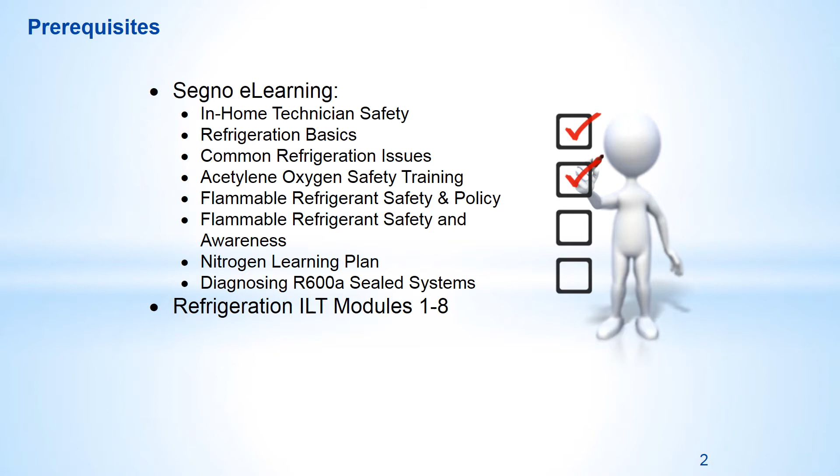Prior to taking this course, you must complete the following prerequisites. In Segno e-learning, In-Home Technician Safety, Refrigeration Basics, Common Refrigeration Issues, Acetylene Oxygen Safety Training, Flammable Refrigerant Safety and Policy, Flammable Refrigerant Safety and Awareness, the Nitrogen Learning Plan, and the Diagnosing R600a Sealed Systems Learning Plan, and Refrigeration Instructor-Led Training Modules 1 through 8. It is recommended that the modules be taken in the order shown. This is Part 1 of Evaporators and More.

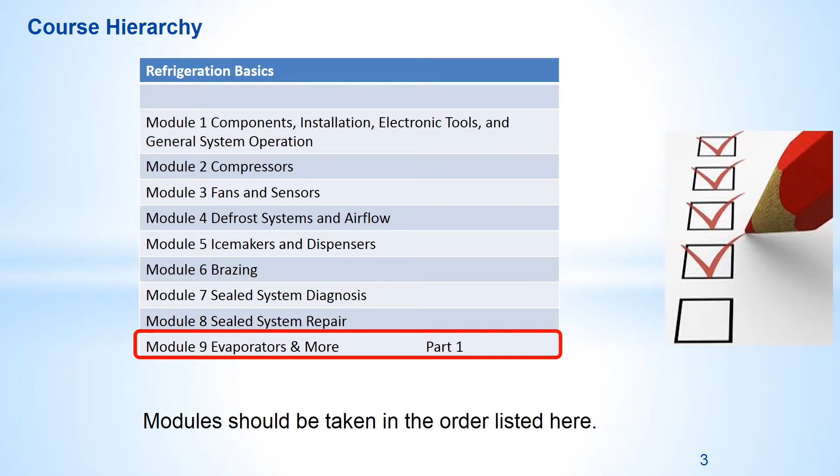In this course you will learn how to understand when, why, and how to use dye dryers, review the evaporator and heat exchanger replacement process, discuss the non-repairable scenario, understand different designs of dual evaporator products, describe how the stepper valve operates and how to diagnose, and understand how to diagnose and order parts for the R600A system.

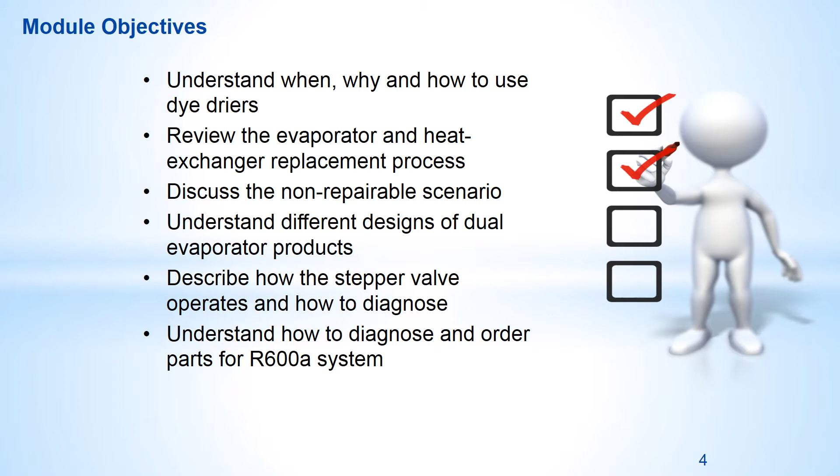In the prior modules and per Service Bulletin 46-11, the leak checks can initially begin with the electronic leak detector and gas trap if refrigerant pressure currently exists in the system. You should always be on the lookout for traces of oil as well. When that doesn't work, or if there is no pressure or not enough pressure, any remaining refrigerant in the system is recovered, then dry nitrogen is used at maximum safe pressure and the leak found using an approved leak detection solution. When the leak is located, safely release the nitrogen, then repair the leak and replace the dryer.

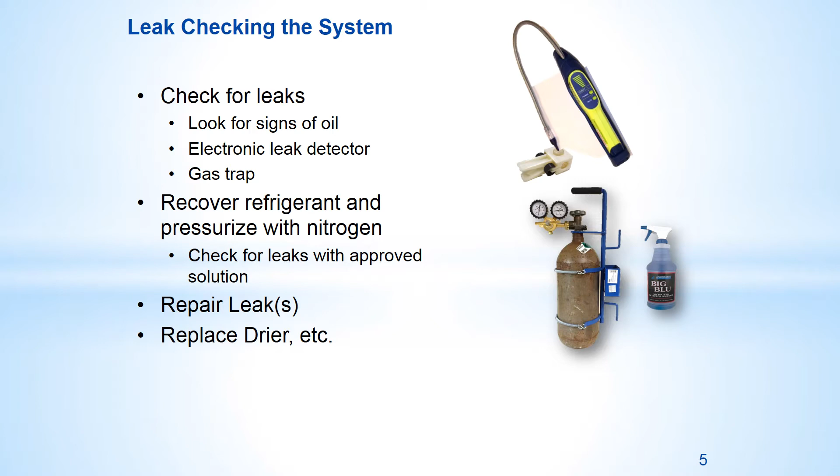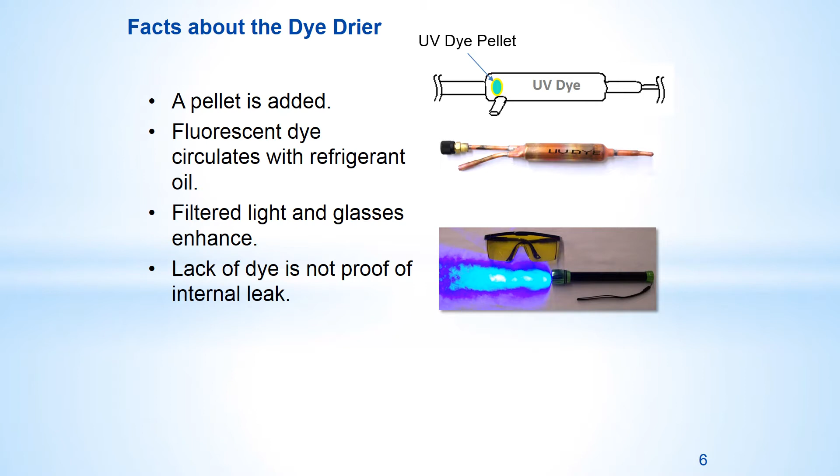Service filter dryers labeled as UV dye contain a dye pellet inside. The pellet releases dye into the refrigerant and oil and requires time to circulate throughout the system. 72 hours of operation should be allowed before examining with the UV light and glasses. Most but not all refrigerator manufacturers promote the use of the dye dryer during a seal system repair. When a dye dryer is already installed on the product, a search for dye can aid in locating a leak and can begin right away. Otherwise, the dye must be circulated throughout the system during normal operation and therefore it is recommended to return 72 hours later.

A lack of dye found on an external component and tubing does not prove that a leak exists internal of the cabinet. Be aware that fluorescent leak detection solution can appear to be a leak when using the filtered light and glasses. All solution should be wiped off completely, as some may pit the metal tubing and create a leak. Also, the Lokprep used for Lokring connections can also simulate dye. A factory Lokring is shown here. Here are some examples of service dryers with UV dye. Most product does not include a dye dryer during production and therefore it is not typically listed on the parts list.

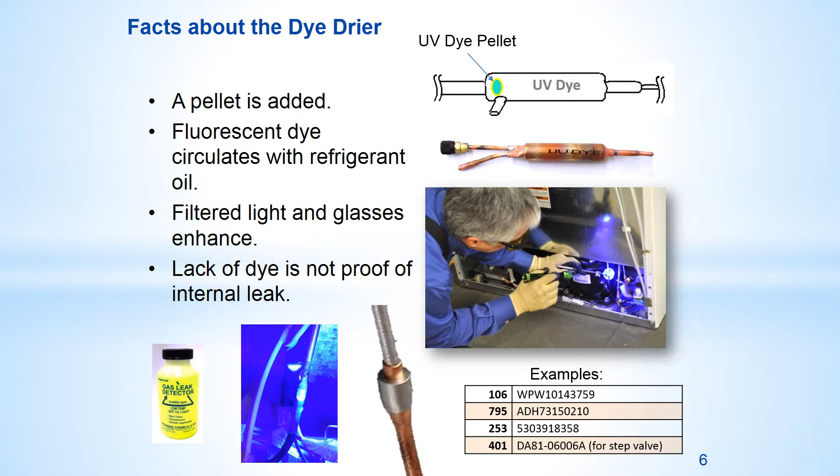There are some exclusions for dye dryer use. Do not install a dye dryer on a product where the seal system components are in direct contact with a consumable item, such as a freestanding ice maker of the type where the water flows across the evaporator. If a leak develops, the dye will go into the water or ice and could be consumed by the user. Also, GE does not allow dye in their refrigeration product and will not pay that claim and will likely void the warranty. For GE branded product warranty service calls, do not install a dye dryer, again, as GE does not allow it. On an out-of-warranty call, such as on a protection agreement call, a dye dryer may be used on GE product.

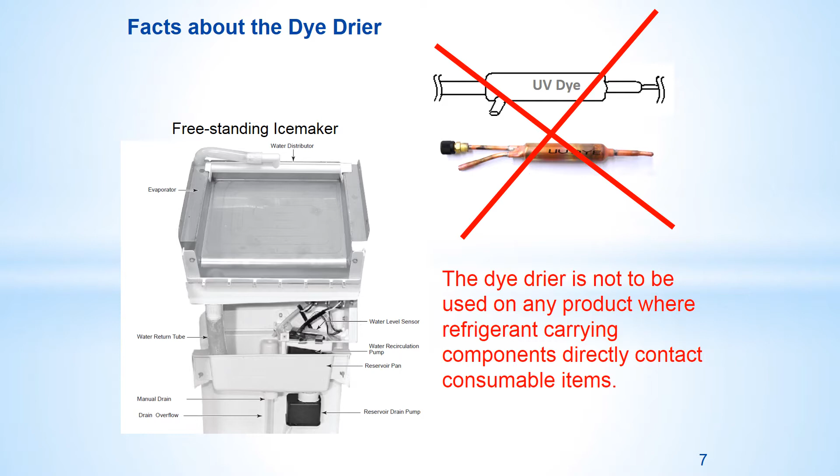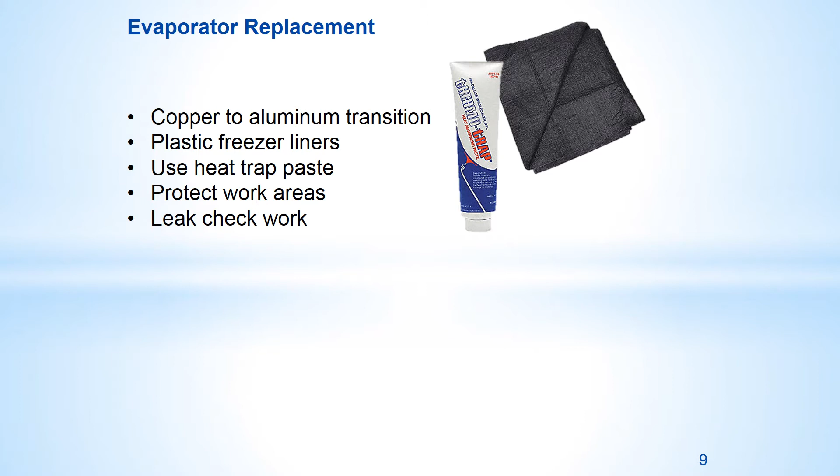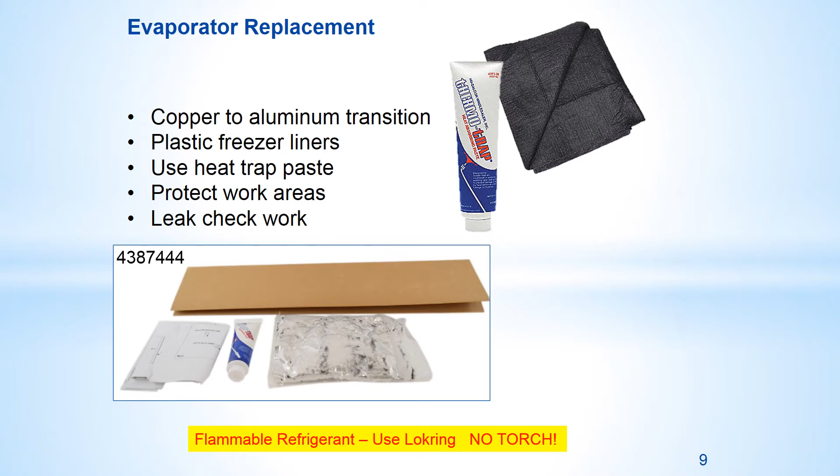We do not repair aluminum evaporators, and most are replaceable. When brazing, do not overheat the aluminum to copper transition. Precautions are required not to damage plastic parts and liners. Flame barriers and heat-absorbing paste are a must to protect and prevent damage of plastic parts and liners. The Whirlpool Kit 4387444 includes the paste, flame guard, and a cardboard canopy to keep the heat from the torch from rising and damaging the ceiling in the compartment. All flammable refrigerant systems must use Lokring and no brazing. Lokring can, however, be used on any refrigerant and will eliminate heat-related damages.

Up next are two videos created by Electrolux Frigidaire, and even though these videos have been around a while, the topics of evaporator replacement and heat exchanger replacement are still relevant. Take notes in your participant guide as you watch the videos. Make a point to discuss with your mentor or trainer some things that should be done differently.

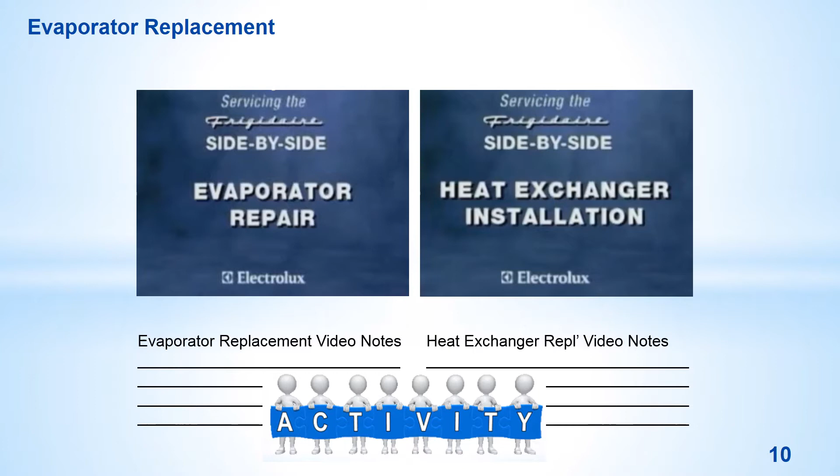Okay, on the evaporator cover, I've already removed the shelves and some of the screws, but one thing I want to point out: it is very necessary when you put these back in that you put the bottom lip of the evaporator cover inside the drain trough. Now, this is a little different than previous models where it went on the outside. Putting it inside will assure any water running down the back side of the evaporator cover will flow into the trough and not leak out between the trough and the cover, winding up underneath the basket in the bottom of

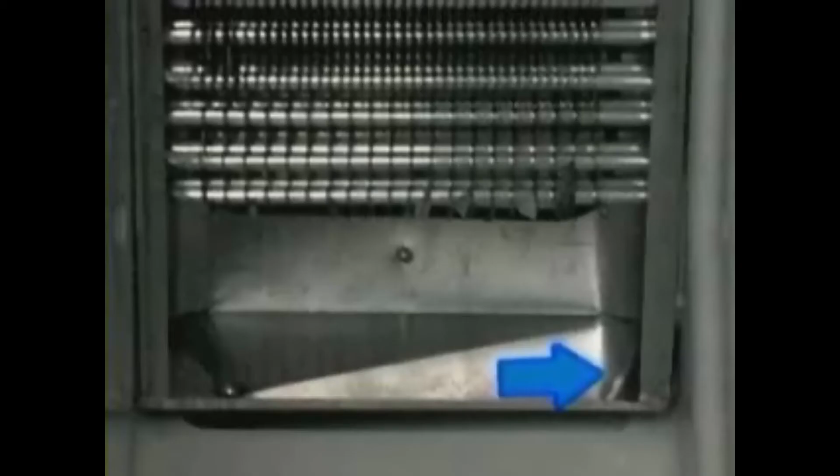your freezer. As you can see, your air return hole right here, but it goes down at an angle, about a 45-degree angle, returning from the food compartment, so you don't have the straight through, and this does stop a lot of the backwash coming through it.

To service the fan motor, it's a lot easier if you remove these two screws. That'll let you lift this panel up without putting a fold mark in it. Now, I found it a lot easier if you just take one of the shelves, sit it back in place and let the cover set down; that'll hold it up out of your way. Unplug the fan motor, disconnect your ground wire, and the fan motor assembly will slide out of here in one complete unit. Then you can go ahead and replace the fan motor or fan blade, whatever you need.

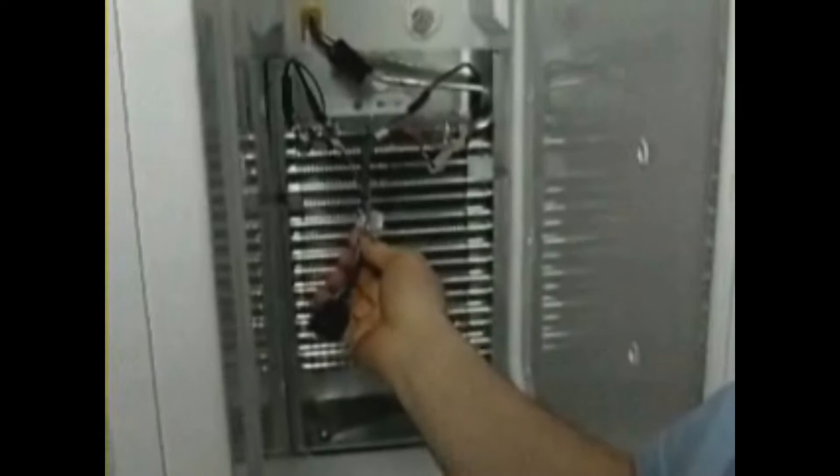Defrost limit switch, of course, is snapped over top of the aluminum evaporator. Simply a matter of reaching in and unclipping it. Now, you will find that it is part of the wiring harness now. Your defrost limiter is hardwired into the harness to get rid of connection problems. The kit that you'll get when you order a defrost limiter will have two solderless connectors and two pieces of heat shrink, so it will be necessary to cut and splice them in.

The defrost heater itself still has the bayonet quick disconnect plugs, so you can unplug your defrost heater, disconnect your one wire, and this takes out basically the removable part of your wiring harness.

Okay, first you're going to want to get the black damper off of here, so take a pocket knife and cut a slit down through here. Remove your damper pad. At that point, you're going to take your three-cornered file and cut yourself a notch around your capillary tube and go ahead and break your cap tube off. Then go ahead and cut your suction line loose from your evaporator. Bend your evaporator up out of the way a little bit. You've got three screws that you're going to have to remove because you will have to tip the drain trough to pull the evaporator out.

Get a hold of your evaporator drain trough and slide that thing slightly forward. And take it on out of the product. Drill out your single pop rivet. That'll allow you to pop your clamp out and take your old evaporator out of your drain trough.

You'll at that point have to transfer your defrost heater to your new evaporator and make darn sure that you replace these two foam blocks that go on each side of the evaporator. They are essential for the refrigerator's operation, and a lot of times they get left out. But these are what force the air to go between the fin and tubes and not go up alongside and bypass the evaporator. Set your evaporator back down in your drain trough.

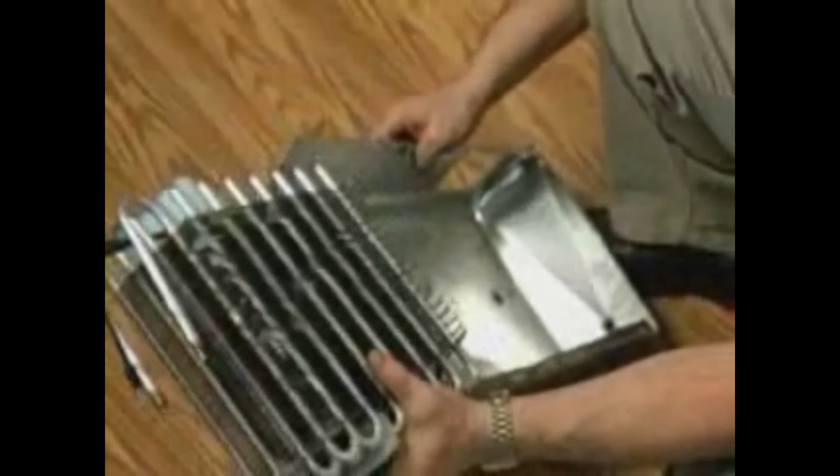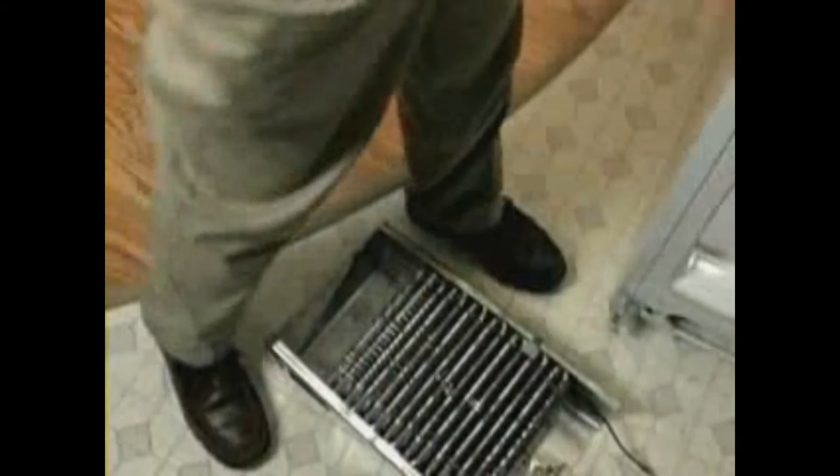Take your replacement hanger bracket. Now that you've got this ready to go back in, we'll have to prepare our heat shield for the back of our liner to protect it from damage when doing your welding. Coming in your evaporator kit, you've got a fiberglass cloth. Just take a sharp pocket knife and cut yourself a small X right in the middle of the cloth. What you want to do at this point then is push this over top of that heat exchanger sticking out of the back of that cabinet.

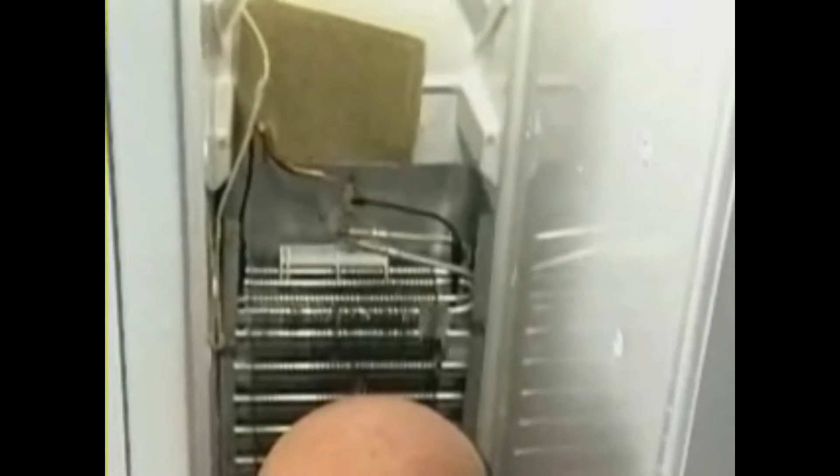Okay, now take your drain trough and set it back in place, using the drain trough to hold the heat shield in place. This will allow you to slide your evaporator up. Line up your suction line and connect it into your new evaporator.

Okay, go ahead and insert your capillary tube back into your evaporator. In most cases, you will have to crimp it just a bit. Make sure it stays there until you make your weld.

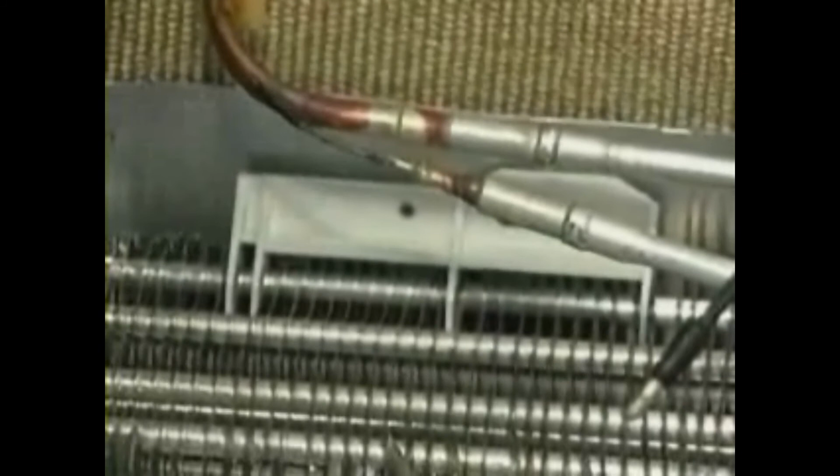At this point, you're going to want to take your heat shield off, but before you do that, go ahead and take your inspection mirror and go around your welds real well, making darn sure that you've got a good weld before you take that heat shield out of there. Check both your suction line and your capillary tube. For the few minutes it takes, it's a lot easier than trying to fish that heat shield back in again once you've removed it. Looks like we've got a couple good welds.

Now at this point, what you want to do is simply go into one of the seams and just start slitting the heat shield and pulling it upwards. The heat shield was designed for one-time use. We do not recommend reusing them. You will get a new one with any additional evaporator that you would order.

Get the rest of your residue out of there. You can now shove the evaporator back into place. Push it down until you get it lined up with your holes, and go ahead and put your screws back in.

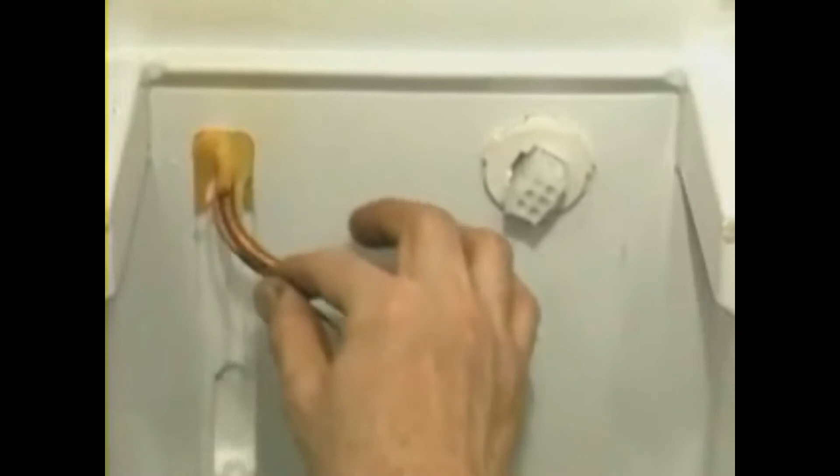When you have a blocked capillary tube and it becomes necessary to replace the heat exchanger due to the fact that the original heat exchanger is buried, you're not going to be able to take it out. So what you'll have to do is run another one down behind the refrigerator. So tip the original heat exchanger up out of your way and come directly below it and drill yourself a 1/2 inch hole through the back of your cabinet.

Okay, what you're going to want to do is attach your new evaporator to your new heat exchanger. At that point, through the hole you've already pre-drilled in your cabinet, run your heat exchanger through the hole, shove it back in place with your evaporator already in your drain trough. Just keep working it back through the hole in the cabinet.

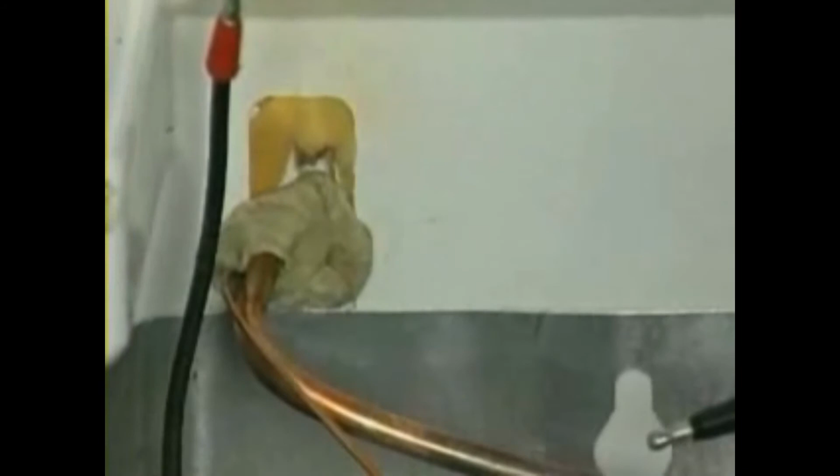Okay, now it's going to be necessary for you to lift your evaporator back up until you get it lined up with the holes. Okay, at this point, go ahead and take your permagum. Permagum your hole shut real good on the inside. Also take a piece of it and permagum the end of the old heat exchanger where you cut that off. At this point, you can go ahead and reinstall your wiring harness and your fan motor.

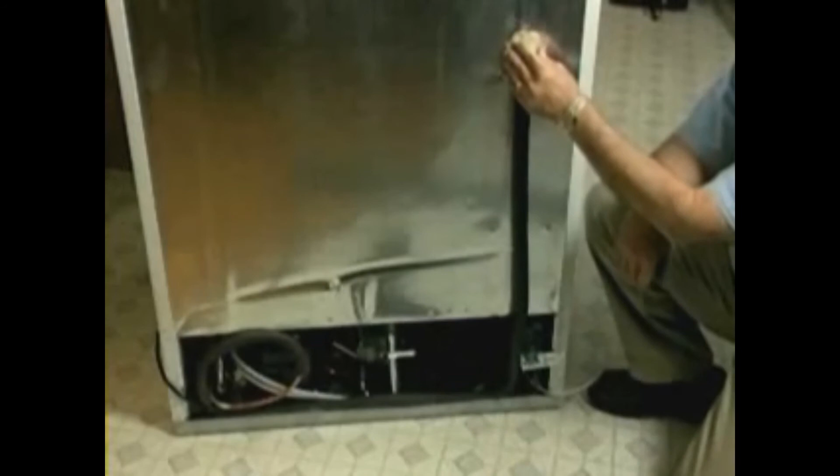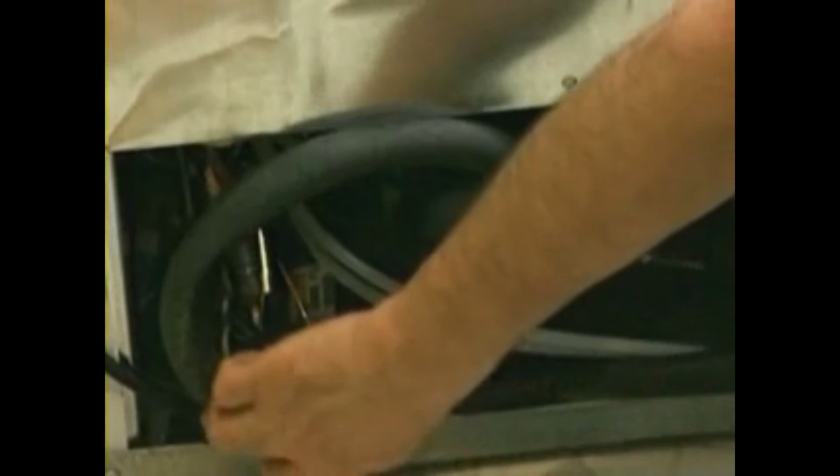After pushing your heat exchanger through the hole, also included in your heat exchanger kit will be a section of Armaflex that you'll need to slide over the heat exchanger and additional permagum to permagum the hole in the back of the cabinet shut. Reroute your heat exchanger down and across the back of your refrigerator. Bring it around in a full circle. Connect your suction line into your compressor suction line.

Your capillary tube, you'll have a lot of excess cap tube. The easiest thing I've found is just to spin it around the suction line. That helps control rattling in it in the future. Go ahead and connect your capillary tube into your new dryer filter. At this point, you can go ahead and hook onto your dryer filter process tool and your compressor process stub and pump your refrigerator down to recharge it.

While it's pumping down, you also have a new galvanized cover that comes with it that you'll install on the back of the product to cover up the heat exchanger. You should put this on so it's level with the top of your machine compartment. You have screws provided in the kit that will cut their own holes, so it's not necessary to pre-drill the hole. You have holes in the galvanized cover. Just set your screw in there and go ahead and sink your screws in.

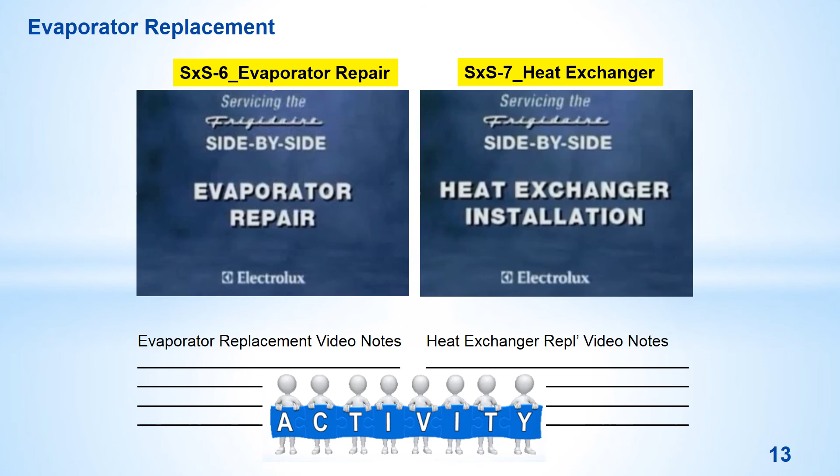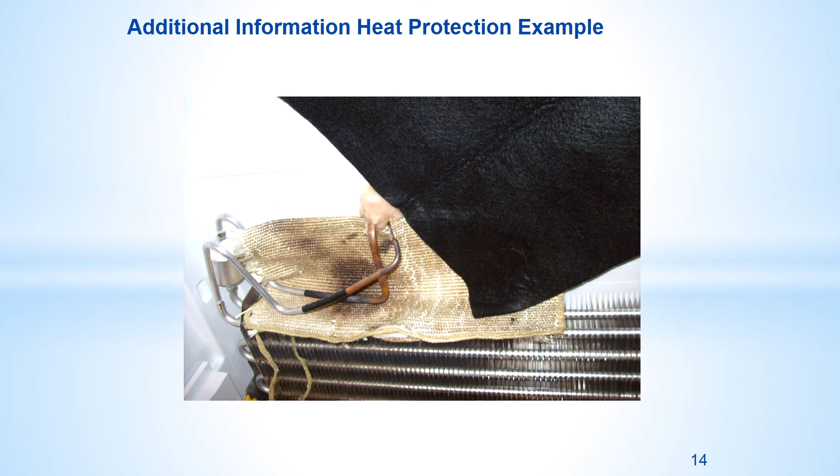Brazing in this area requires some preparation and precautionary steps to prevent damage. When the copper to aluminum transition is near the connection to be brazed, heat trap paste is to be added at the transition to protect it from overheating. To protect the liner, use thermal paste and flame cloth materials.

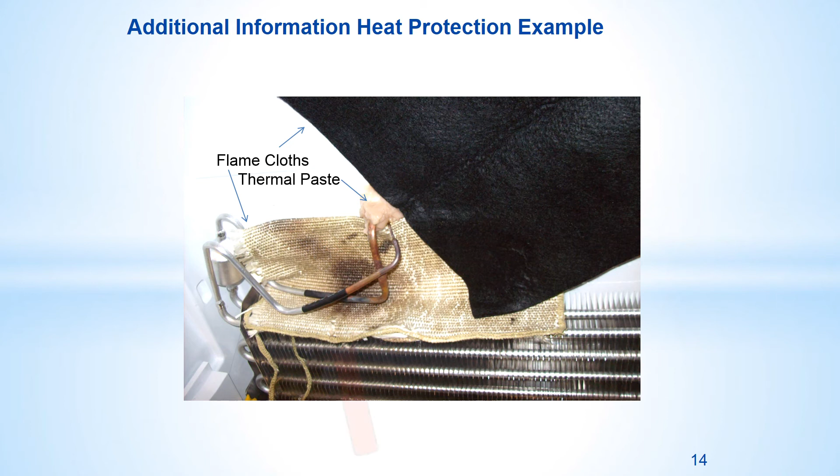For this example, where the crimp was removed on a Source 795 refrigerator capillary, brazing was performed using an air acetylene torch with number 2 tip. The torch flame is pointed to the side to minimize direct contact with the flame-resistant cloth. Lokring will certainly minimize damage since a torch is not required. Note, Source 795 has a replacement capillary tube available, and for single evaporator models only, a replacement heat exchanger is also available. As a reminder, all flammable refrigerant systems must use Lokring, no brazing.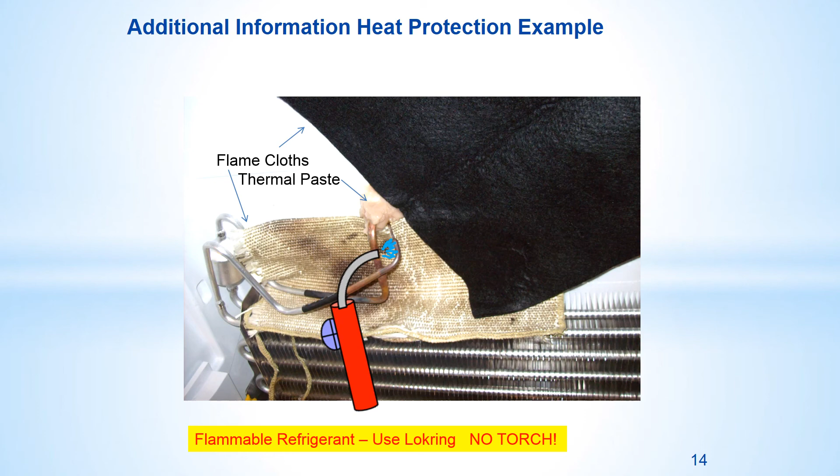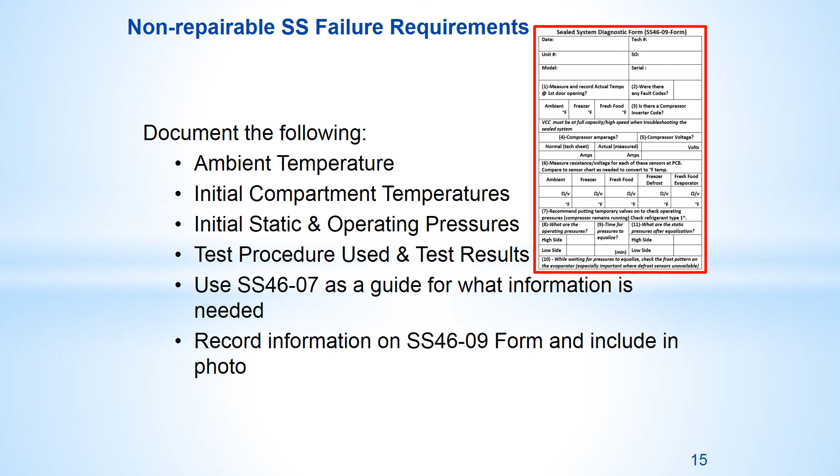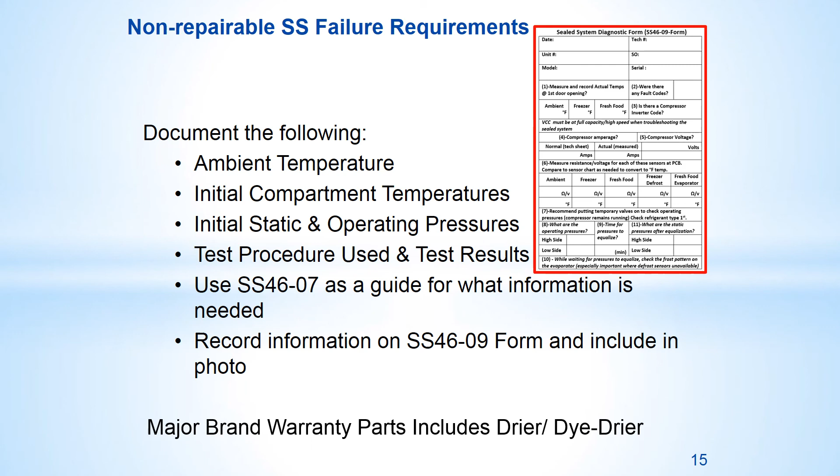Please note that major brand non-Kenmore warranty requires vendor-specific parts, including the filter drier, and most manufacturers now have their own dye-drier. The best way to document your diagnosis is through photos and tech comments. You must call STAC if you have come to the conclusion of a non-repairable failure. Remember the tasks needed before calling STAC.

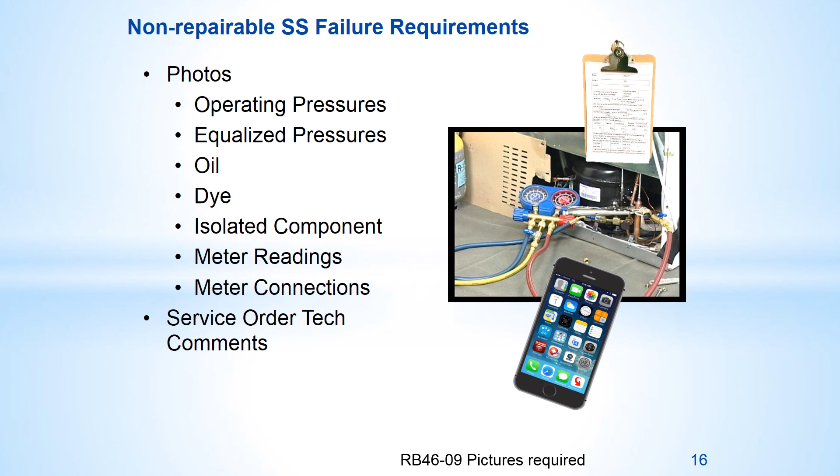It is recommended to send the photos of the progress of the diagnosis prior to calling STAC so the STAC agent can see them sooner than later. Again, use SS46-07 as a guide for the required information. See RB46-09 for more information concerning non-repairable requirements.

This concludes Part 1 of Evaporators and More. Please watch Part 2 at your next available opportunity to continue with sealed system training.